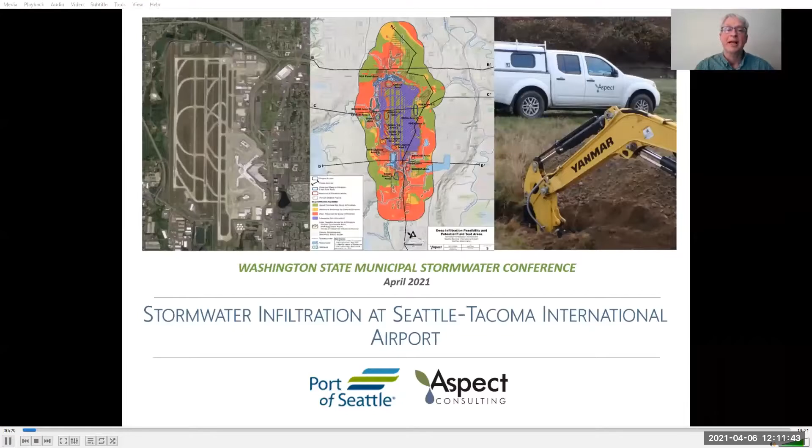I'm going to start by talking about the infiltration feasibility assessment that was conducted back in 2016, followed by the infiltration infeasibility assessment that was conducted in 2017. And that'll lead to the late 2018 shallow infiltration field testing that was conducted. And finally, the development of the shallow and deep infiltration standard operating procedures that were finalized during 2019. And then I'll touch on the planned deep infiltration testing that's scheduled for summer of 2021.

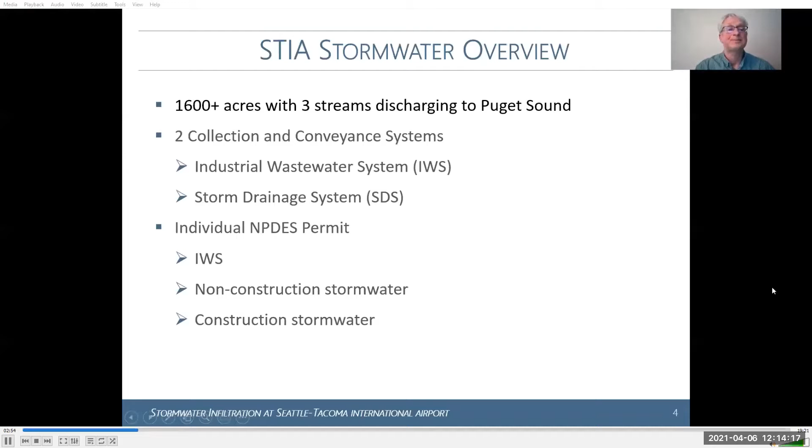There's 2 primary stormwater manuals for the airport. Those are the Stormwater Management Manual for Western Washington, an Ecology document, and then the Stormwater Management Manual for Port Aviation Division. The Port of Seattle has adopted both of these manuals, and the Port's Aviation Manual essentially provides the guidance on how to use Ecology's manuals, considering the unique infrastructure requirements and restrictions at the airport. The third document is the LID, Low Impact Development Guideline, that was developed initially during 2017 to provide guidance and oversight for all LID related activities at the airport.

And finally, when you're outside of the individual permit coverage area, you're into the adjacent local jurisdictions, which are either the city of SeaTac, city of Burien, or city of Des Moines. Each of these municipalities is a Phase 2 municipality covered in the Phase 2 municipal permit, and they have adopted the King County Surface Water Design Manual.

And now, why would you even care about infiltration? Well, other than, LID is required by the permit when feasible. In particular, successful infiltration can provide a flow control benefit. And for those of you that are familiar with the airport, there's some large detention ponds, detention vaults that are all there for flow control purposes. So any water that can be infiltrated can assist that flow control effort.

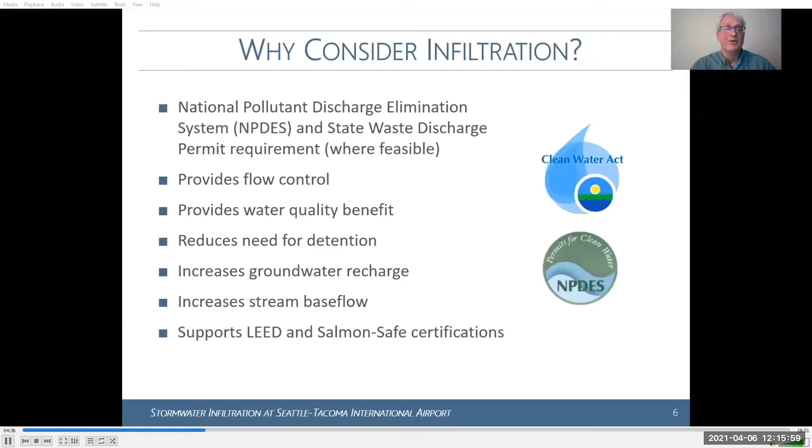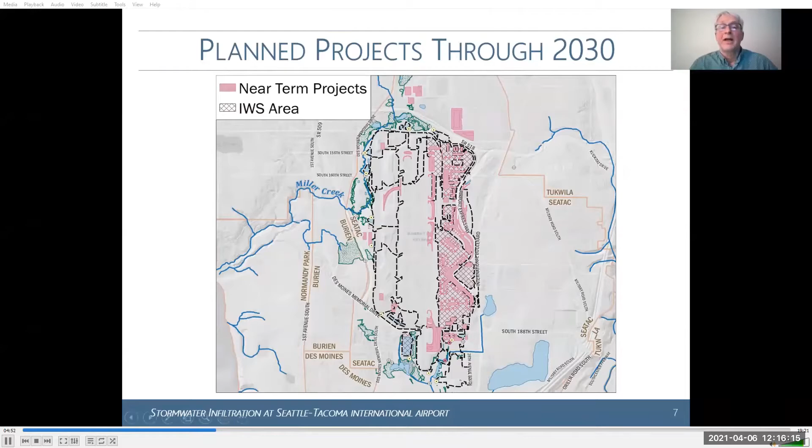And then as shown on the bottom of this screen, infiltration also can be used to support LEED and Salmon-Safe certifications. And finally, the airport has some ambitious development and redevelopment projects planned over the next 10 years. This slide gives an idea of some of the near-term projects. In particular, you can see on the east side of the airport, there's a lot of planned activity in the coming 10 years.

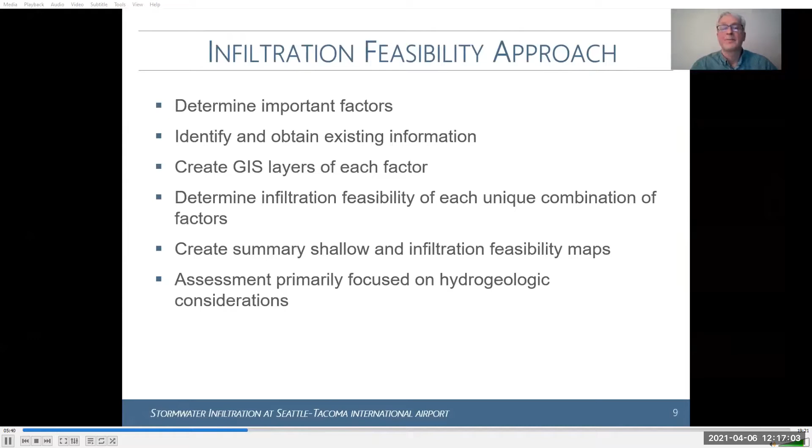So some of the infiltration feasibility factors included the surface geology, surface slope gradient, proximity to steep slopes and landslide hazard areas, thickness of the permeable unsaturated receptor zone, and depth to the receptor unit in the case of deep infiltration.

And then for this feasibility study, we used some infeasibility factors such as infiltration is prohibited into the third runway embankment. But as I'll touch on in a few minutes, the infeasibility study that we conducted later on really focused in on numerous FAA requirements and restrictions that are really unique to the airport.

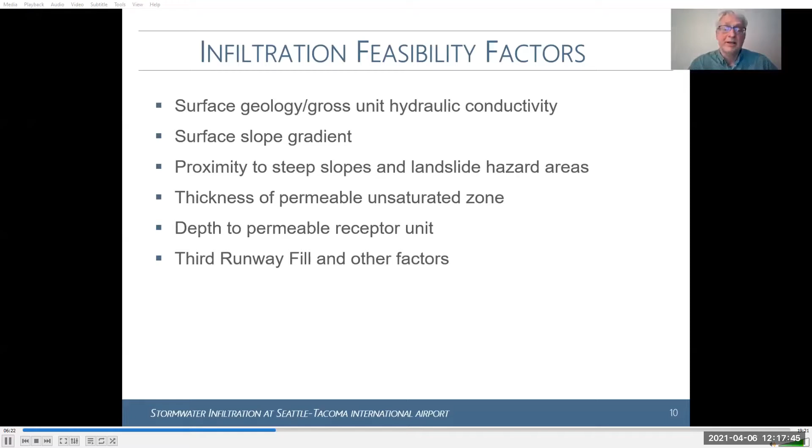So there was a variety of information sources. In particular, I'd like to highlight the 2008 groundwater study. Several years ago, Aspect conducted a really comprehensive geologic and hydrogeologic study in support of the third runway construction and third runway embankment. That included information from over 2,000 boring logs, and a really comprehensive geologic database was created.

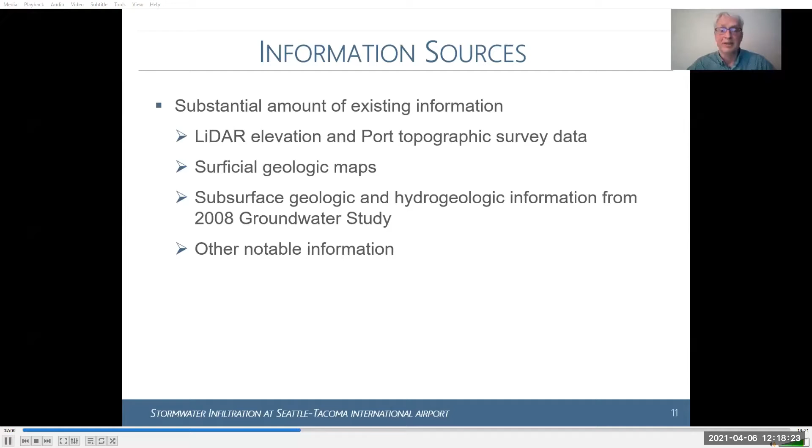And that's really what allowed us to readily conduct this desktop GIS-based feasibility study using existing data without doing any additional field work. So now I'd like to just touch on a couple of the factors that were used in the feasibility study, starting with the ground surface information.

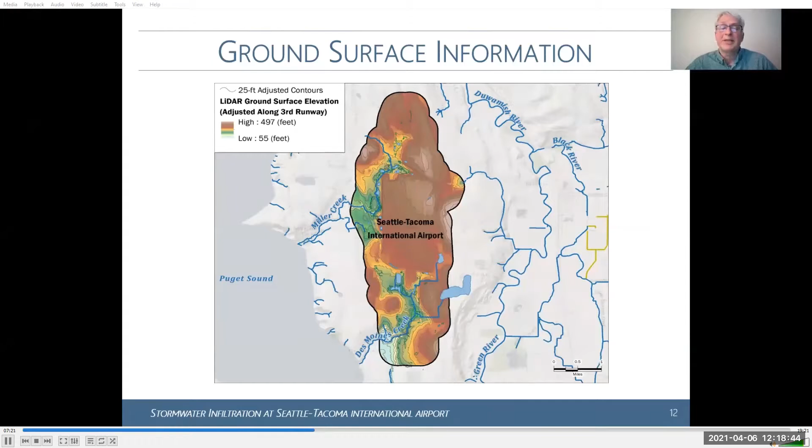This slide shows the LiDAR ground surface elevation. As you can see, it ranges from about 50 feet up to a high of about 500 feet above mean sea level at the airport. And then for geology and hydrogeology, most of you know that glaciation has really impacted the surface geology in the Puget Sound area. And this is true at the airport.

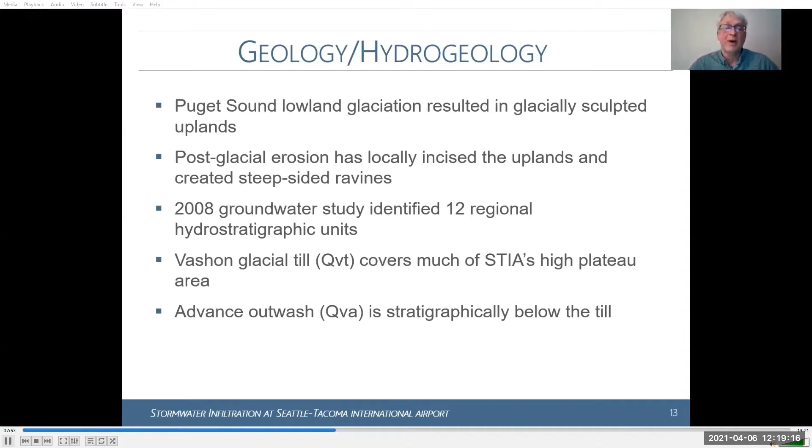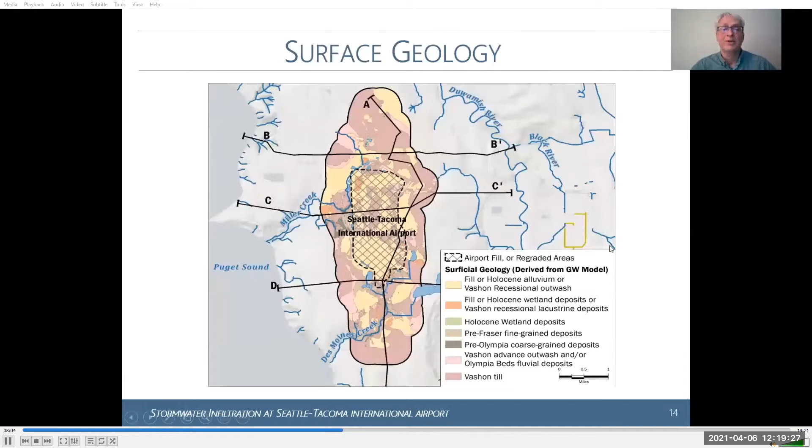And let me touch on a couple examples for some of the factors. This particular one is for the landslide hazard categories. We depicted two different categories, either high to moderate landslide hazard for slopes greater than 40% or within 500 feet of a mapped landslide steep slope hazard area, and everything else was considered low landslide hazard.

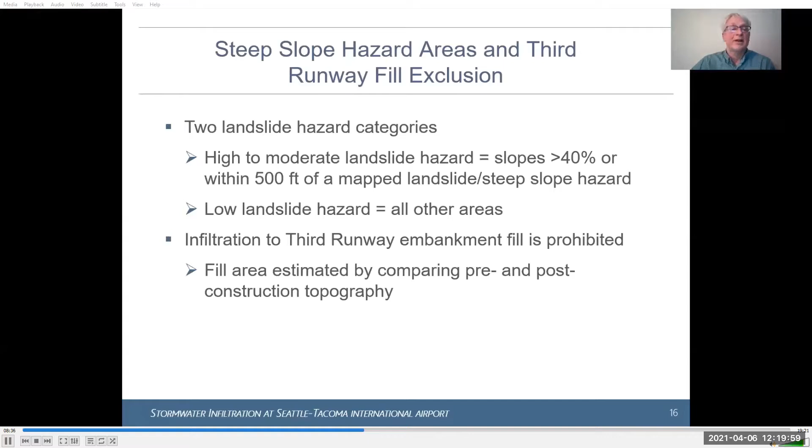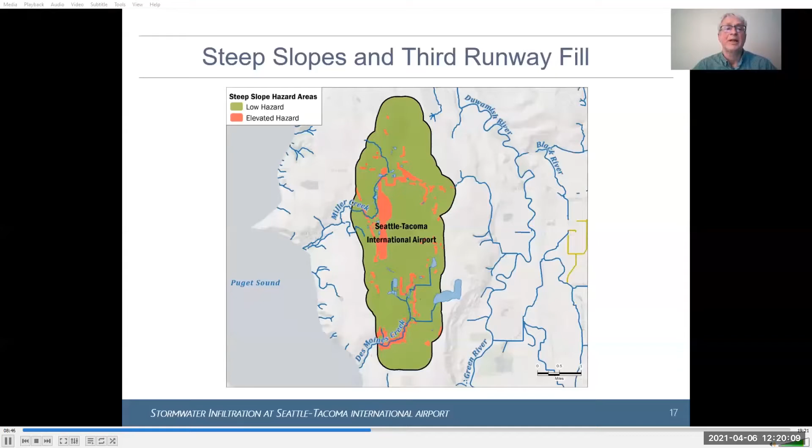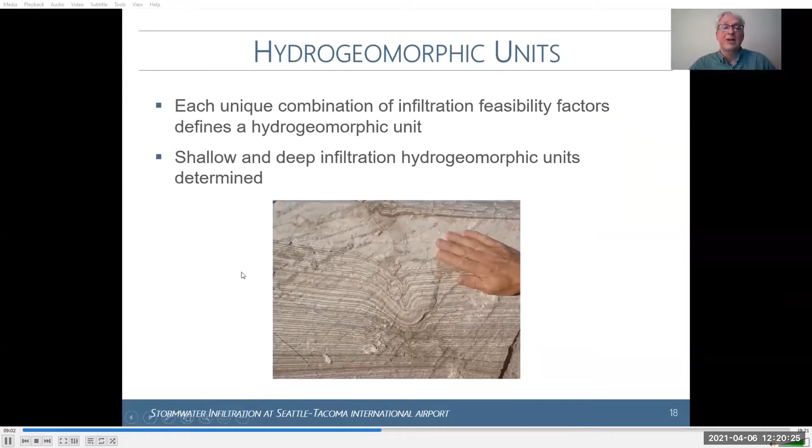And another factor that I've already mentioned was that infiltration into the third runway embankment fill is prohibited. So here's the resulting GIS layer just for the steep slopes and third runway fill category. So from these different factors, each unique combination of these infiltration feasibility factors defines a hydrogeomorphic unit. And from this, the shallow and deep infiltration hydrogeomorphic units were determined and mapped.

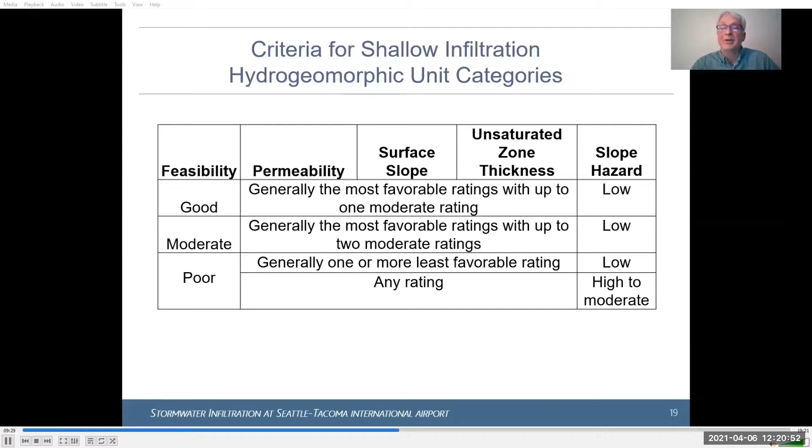So I'll just show you, for example, the criteria for the shallow infiltration hydrogeomorphic units. Good feasibility generally had the most favorable ratings with up to one moderate rating and a low slope hazard. Whereas poor feasibility generally had one or more of the least favorable ratings, or if it had a high to moderate slope hazard, with any rating, it would hit the poor feasibility category.

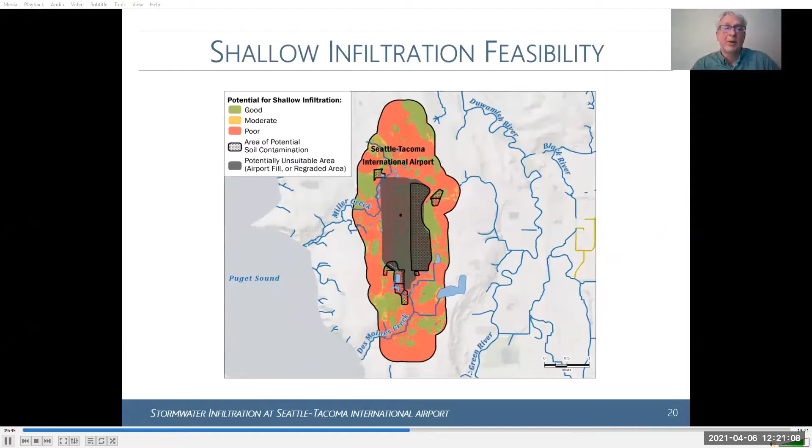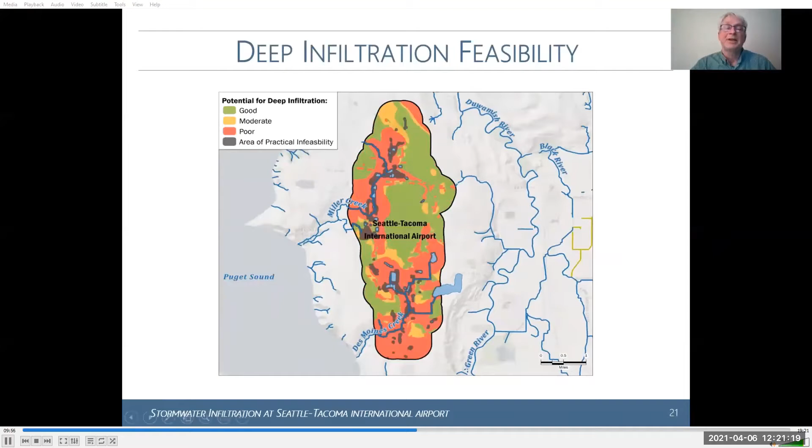Here's the resulting map for the shallow infiltration feasibility. Red indicates poor infiltration feasibility, yellow moderate, and green is good. And here's the similar map for the deep infiltration feasibility. As you can see, deep infiltration in general appears more feasible at the airport relative to shallow infiltration.

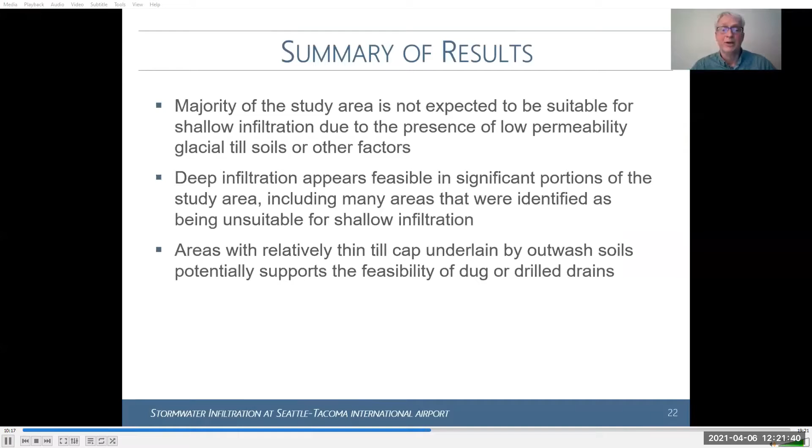And again, as I've already touched on, that's because a lot of the airport's surface area is covered either with fill or with glacial till at or near surface. Whereas underneath that thin till cap, there's some pretty good looking outwash soils that potentially could support the feasibility of deep infiltration. Now I'd like to talk about the 2017 infiltration infeasibility assessment we conducted.

And again, this really takes into account the competing needs for STIA operations, in particular the many standards and requirements that go with the FAA, the Federal Aviation Administration. And these are unique to airports. And if you look at chapters 3, 5, and 7 of the Stormwater Management Manual for Western Washington, it describes infeasibility criteria for infiltration.

And chapter 5 in particular goes on to state that a local government can map areas that meet specific infeasibility criteria provided they have an adequate data basis. And there's an example of some of the criteria that are amenable to infeasibility mapping. So for the airport, a really important consideration is FAA requirements and proximity to FAA operation zones, the IWS area where infiltration is prohibited, and proximity to airport operations areas.

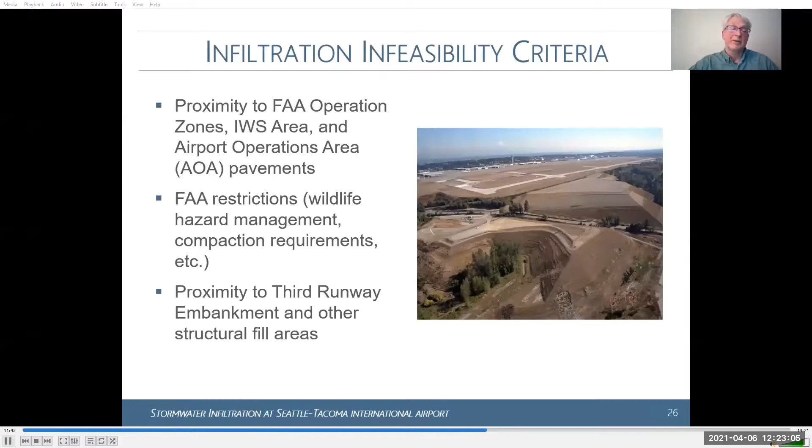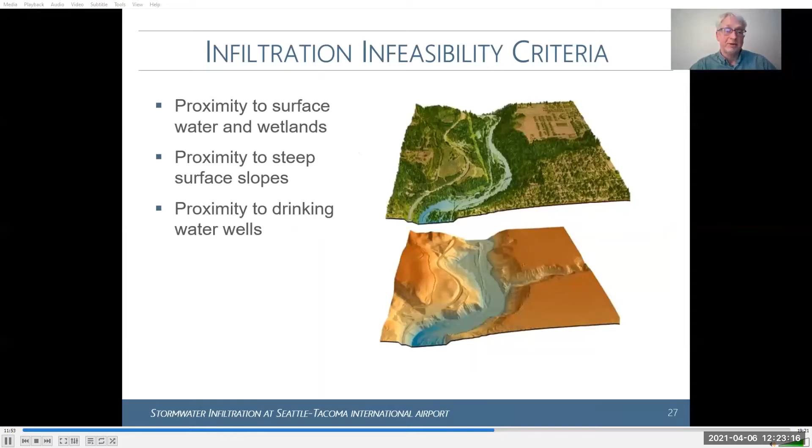There's also other FAA restrictions, including wildlife hazard management, and as I already mentioned, proximity to the third runway embankment and other structural fills. Some of the other infeasibility criteria include proximity to surface water and wetlands, steep slopes, and proximity to drinking water wells. So here's the comprehensive map showing infiltration infeasibility at the airport, with purple indicating not feasible and brown indicating low feasibility. So again, for shallow infiltration, due to a number of factors, there's pretty limited potential for infiltration.

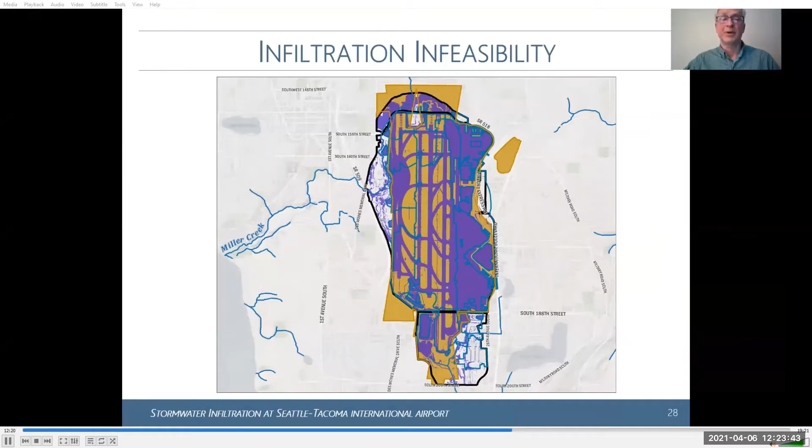Now, what I want to do is just sidestep for a minute and, for the benefit of municipalities, touch on what an infeasibility assessment could look like for a city. This example is one we prepared for the city of SeaTac, and it's the LID BMP infeasibility assessment. So for the city of SeaTac, we determined LID infeasibility by individual BMP type.

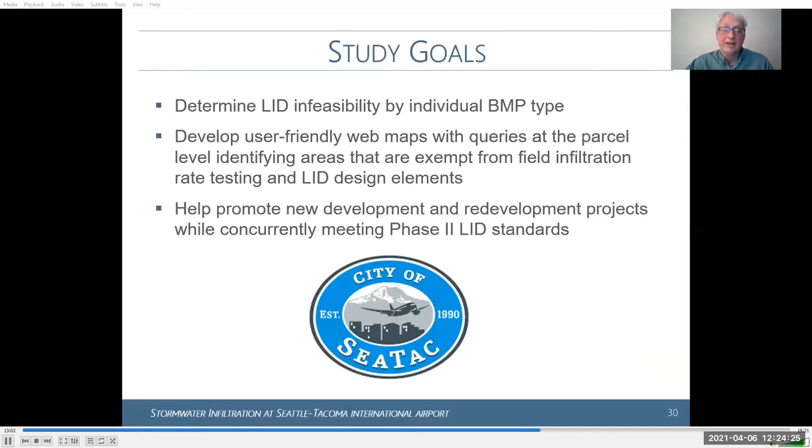And then we developed user-friendly web maps that allow for queries at the parcel level. And these queries will identify areas that are exempt from any field infiltration testing and LID design elements for the areas that, for the particular individual BMP, have been mapped as infeasible.

And the approach for this was to use readily existing GIS data sets. So again, this was a desktop exercise, no additional field work was required. And then we incorporated the infeasibility criteria specified in the King County Surface Water Design Manual as amended by the SeaTac addendum. And we created GIS models for each LID BMP and prepared individual infeasibility maps.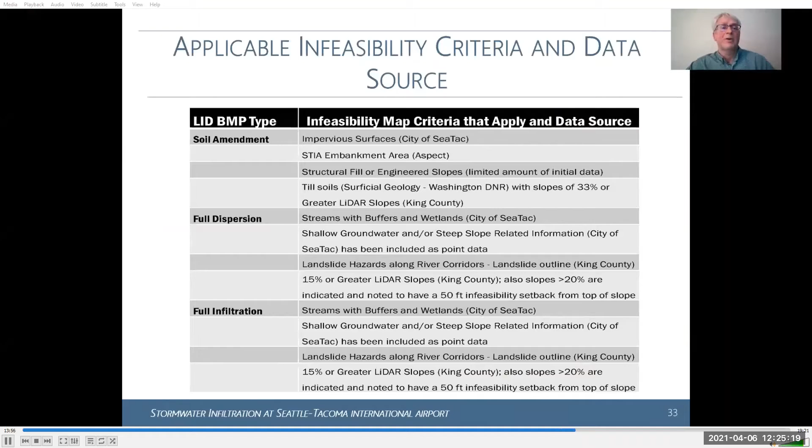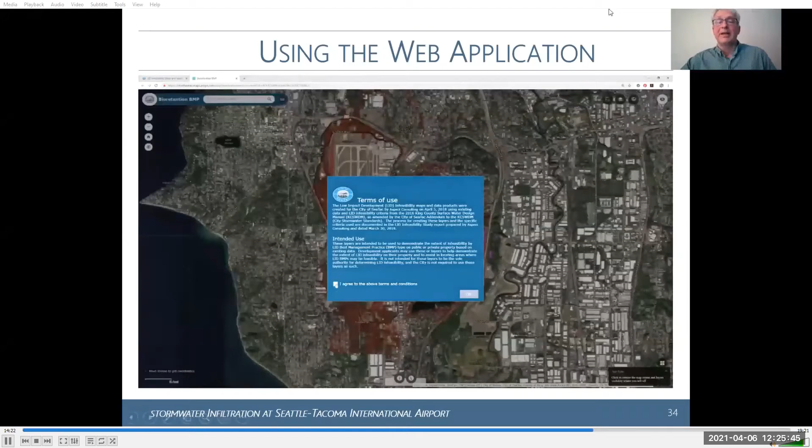And then finally, using the actual web application is shown on this next slide, and I'll just scroll down here. And so this is a link to the feasibility maps on the City of SeaTac website. There's the 10 individual maps. We'll select the bioretention BMP, and that'll pop up a map of the entire City of SeaTac area. And then if we zero in on a particular area or a particular parcel number, we can see for this particular application what's been mapped as infeasible for bioretention.

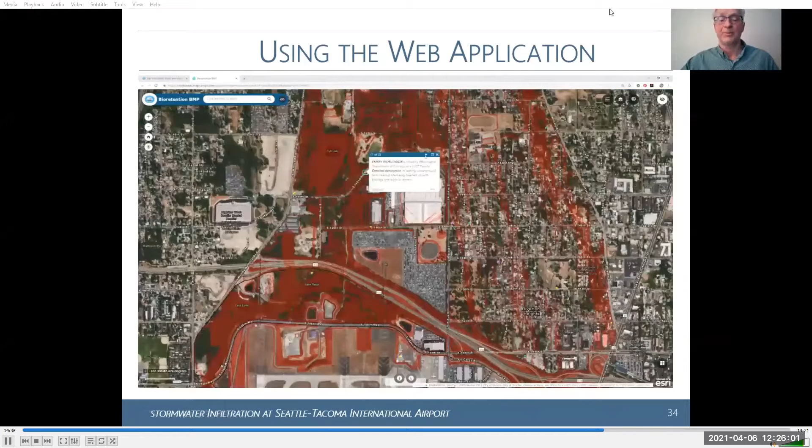Now I'd like to move on to the 2018 shallow infiltration field testing that was done at the airport. I should mention that back in 2017, Aspect's Andrew Ostrecht and myself presented the methods for the field work for determining infiltration field rates. And this is the detail that was followed for the shallow infiltration testing at the airport in 2018. The reason the initial work focused on shallow instead of deep infiltration testing is that shallow infiltration testing is relatively quick and relatively cheap compared to deep infiltration testing.

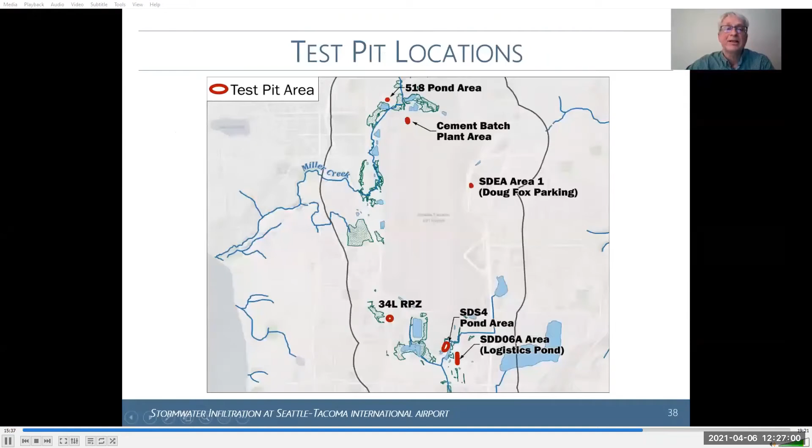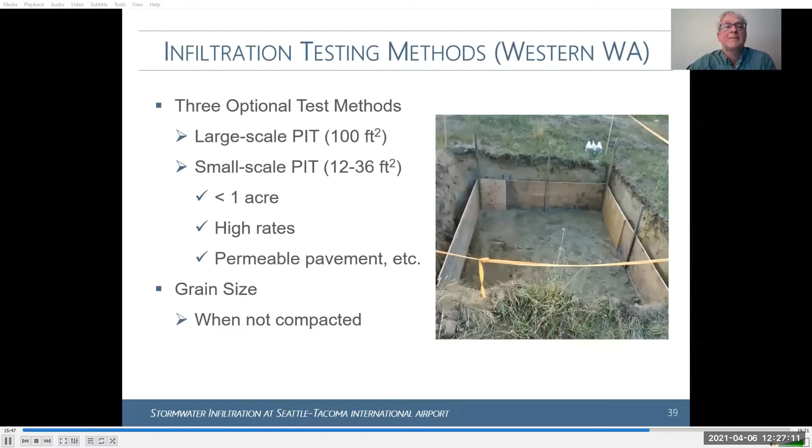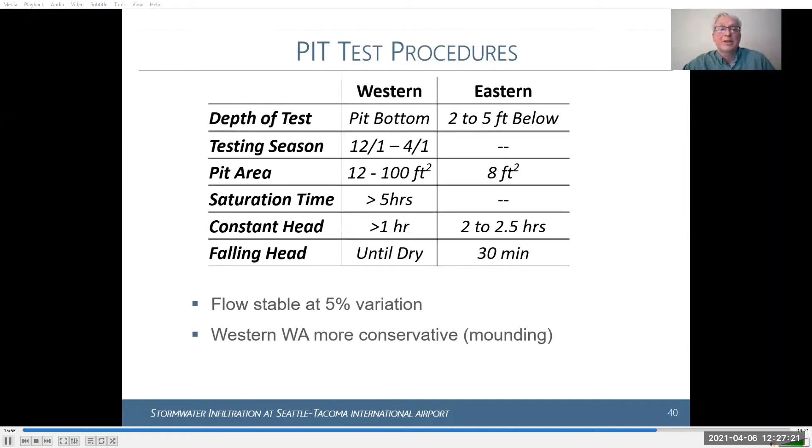So based on available information and input from port staff, 6 areas were selected for field testing that occurred in December of 2018. This slide shows the 6 areas that had test pits dug. And then the infiltration testing actually used the small scale pilot infiltration tests that's shown on this slide. And the procedures, this is a slide borrowed from the 2017 Municon presentation, utilize the Western Washington procedures that are shown on this slide. So multiple test pits were dug in each area, small scale PITs were conducted, and kind of in a nutshell, the results confirm the shallow infiltration feasibility mapping that had been done 2 years previously.

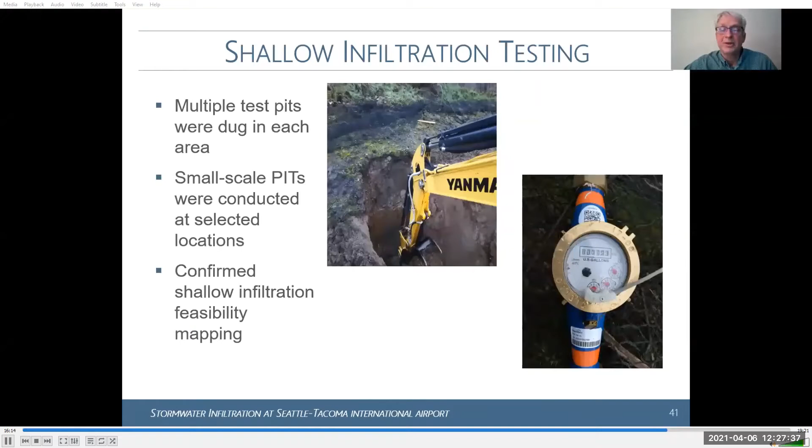Then in 2019, the shallow and deep infiltration standard operating procedures were developed. These provide detailed guidance and sequencing for the planning, testing, analysis, and design of shallow or deep infiltration facilities at the airport. And these largely track with the 2019 Ecology manual requirements and include the new UIC, underground injection control, requirements. And so these are very comprehensive SOPs. They include example tasks, schedules, costs, and checklists. And again, they're intended to provide guidance for all future development and redevelopment projects at the airport.

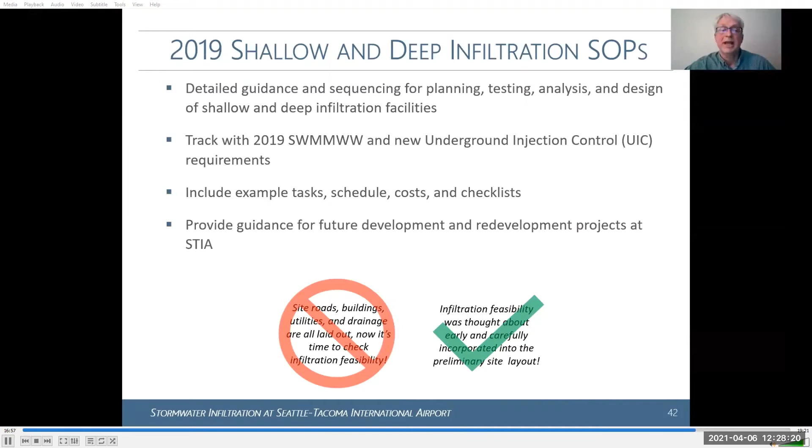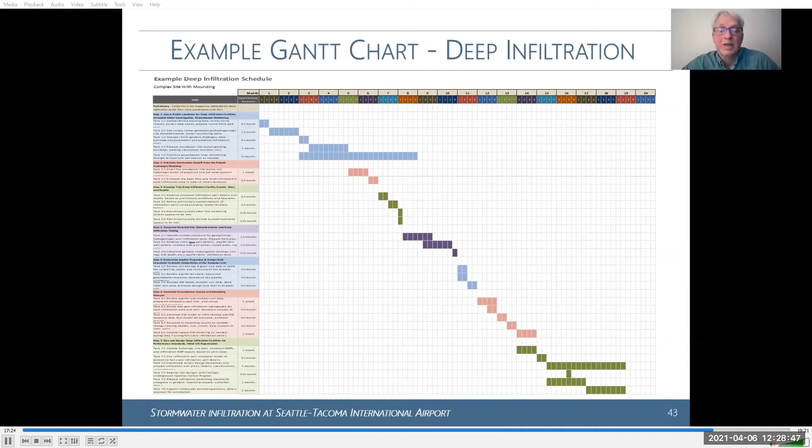I know you can't see this particular slide very well. This is just an example Gantt chart that was developed for deep infiltration. And what I wanted to point out with this is that this isn't a quick turn effort. It's not a 1 or 2 week effort and you're good to go. In the case particularly of deep infiltration, if a mounding analysis is required, the total process from beginning to finalizing design can take 18 to 24 months. So plan that timeline accordingly in your project development.

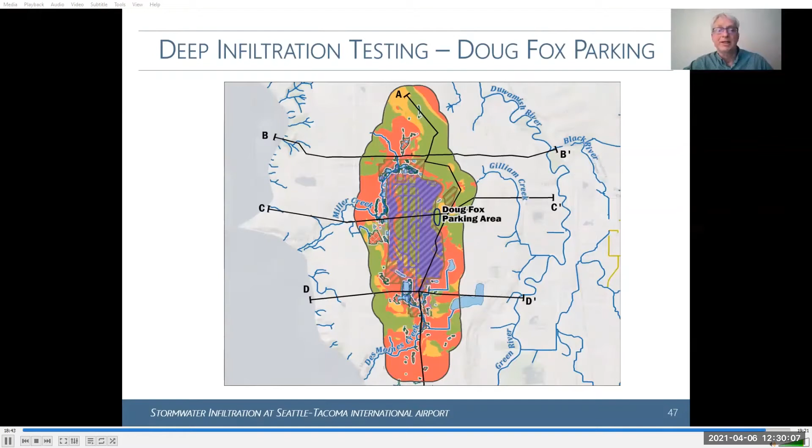And finally, in 2021, we're planning on doing deep infiltration testing. As I've already mentioned, it looks more feasible than shallow infiltration. And the testing is planned at multiple areas, including the Doug Fox parking lot area. That's shown on this slide. It's kind of east side of the active airport area, in an area that's been previously mapped as looking as good feasibility for deep infiltration. And in the Doug Fox area, from existing borehole logs, we know there's about 35 feet of fill and glacial till at the surface that's underlain by about a 50-foot unsaturated permeable receptor zone. So it'll be that 50-foot zone that we'll look at testing later this summer.

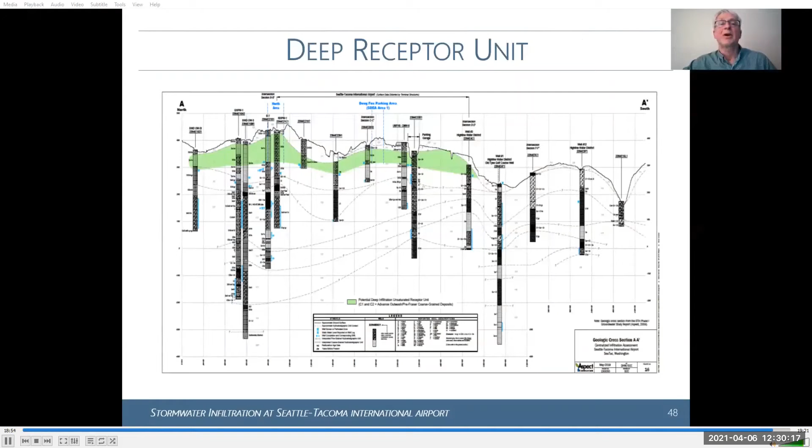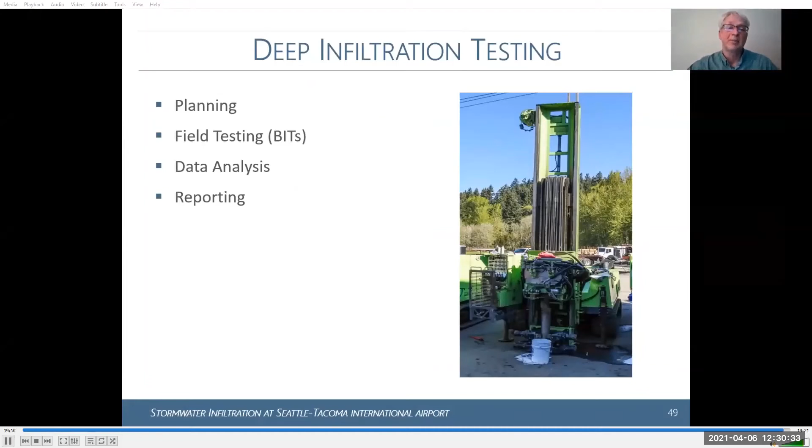This is just an example cross-section showing that deep receptor unit that's highlighted in green here, with the Doug Fox parking area being about right in the center of this cross-section. And finally, for the deep infiltration testing, we've got some steps that we've got to do. We've got to plan and develop a field program, do the actual field testing, which will be borehole infiltration tests, followed by data analysis and reporting.

And with that, I am ready to open it up to questions and discussions.